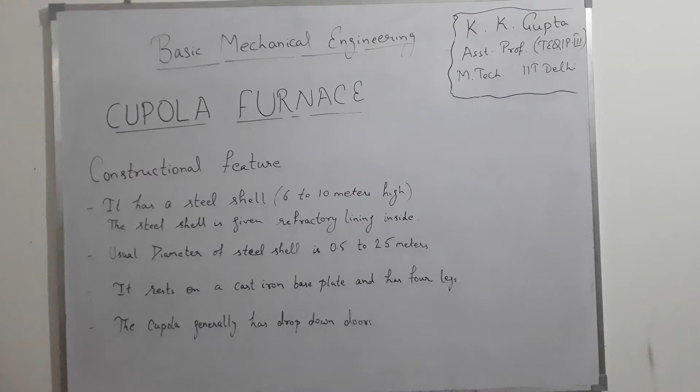Hello dear students, in this session we will study cupola furnace. Cupola is the oldest and simplest furnace. Cupola is derived from the Latin word cupa, which means barrel. It is much similar to blast furnace.

Let's understand the construction features of cupola furnace. It has a steel shell around 6 to 10 meters in height, and the steel shell is given refractory lining inside. Usual diameter of this steel shell is 0.5 to 2.5 meters. It rests on a cast iron base plate and has 4 legs. The cupola generally has drop down doors.

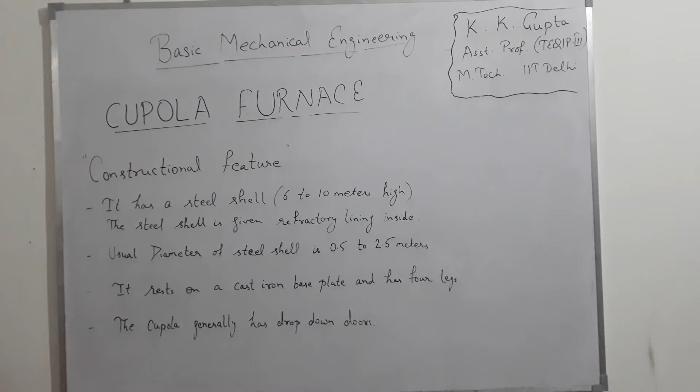At the bottom there is a tap hole to remove molten metal. There is also a slag hole to remove the slag. The charge is introduced into the furnace body by means of an opening approximately halfway up the vertical shaft. The charge consists of alternate layers of the metal to be melted, coke fuel and limestone flux.

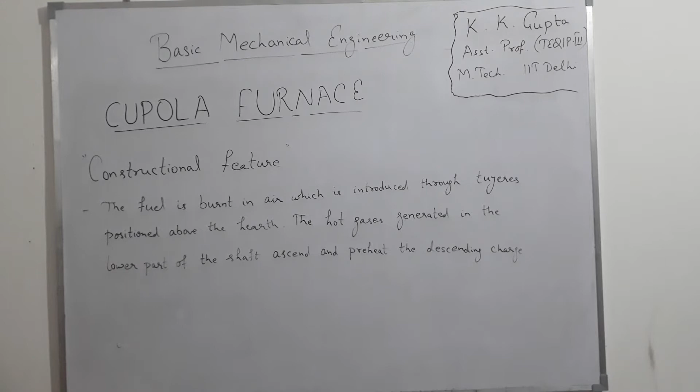The fuel is burnt in the air, which is introduced through tuyeres positioned above the hearth. The hot gas is generated in the lower part of the shaft, ascends and preheats the descending charge. Construction details of cupola are shown in the figure. You guys can pause the video and draw the diagram.

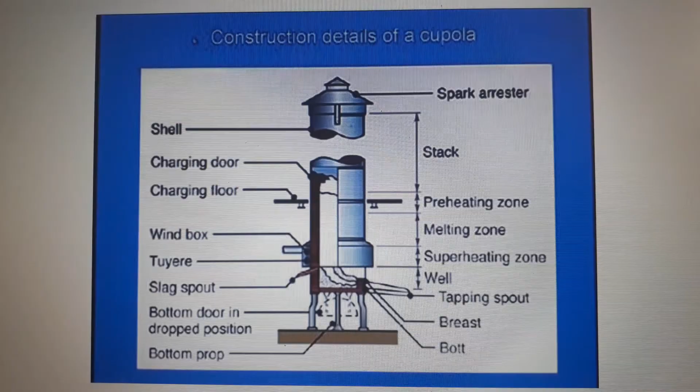Now, various zones of cupola furnace. First is well: the space between the bottom of the tuyeres and the sand bed inside the cylindrical shell of the cupola is called the well of cupola. As the melting occurs, the molten metal gets collected in this portion before tapping out.

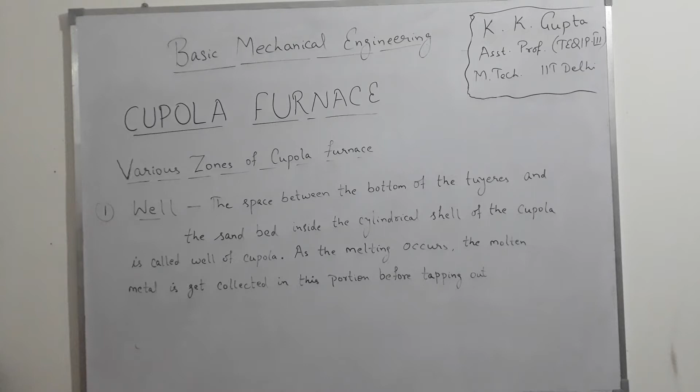Second zone is combustion zone. It is also called oxidizing zone and it is also called superheating zone. It is located between the upper level of the tuyeres and a theoretical level above it. The total height of this zone is 15 cm to 30 cm. A temperature of about 1540 degrees Celsius to 1870 degrees Celsius is achieved in this zone.

Few exothermic reactions take place in this zone. These are represented as carbon plus oxygen gives carbon dioxide plus heat, silicon plus oxygen gives silicon dioxide plus heat, manganese plus oxygen gives manganese oxide plus heat. The combustion actually takes place in this zone by consuming the free oxygen completely from the air blast and generating tremendous heat.

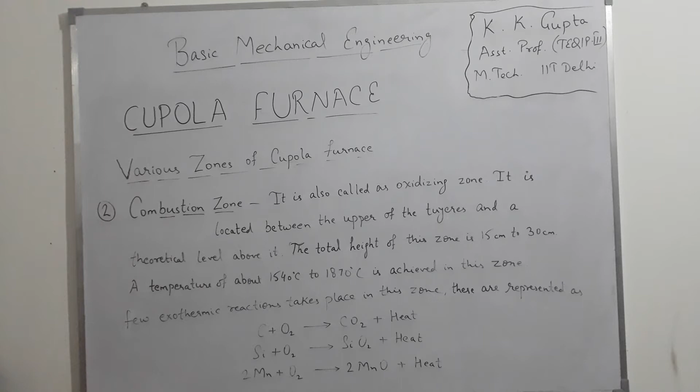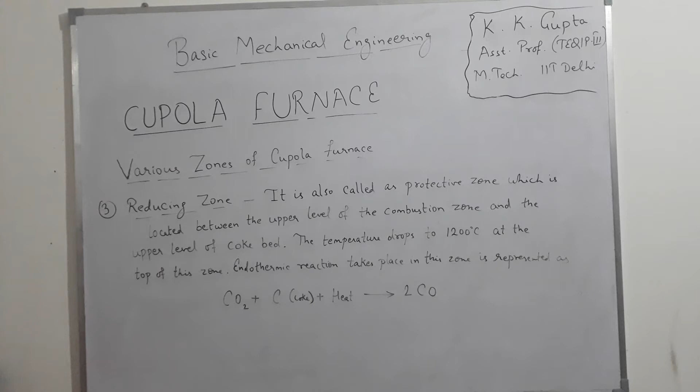Third zone is reducing zone. It is also called protective zone, which is located between the upper level of the combustion zone and the upper level of coke bed. The temperature drops to 1200 degrees Celsius at the top of this zone. The endothermic reaction that takes place in this zone is represented as carbon dioxide plus coke plus heat gives carbon monoxide. Since an endothermic reaction takes place in this zone, the temperature decreases from 1800 to around 1200 degrees at the top of this zone. Combustion zone plus reducing zone is also known as superheating zone.

Fourth zone is melting zone. The lower layer of the metal charge above the upper layer of the coke bed is termed as melting zone. The metal charge starts melting in this zone, trickles down through the coke bed and gets collected in the well. The reaction that takes place in this zone is iron plus carbon monoxide gives iron carbide plus carbon dioxide. It means 3Fe plus 2CO gives Fe3C plus CO2.

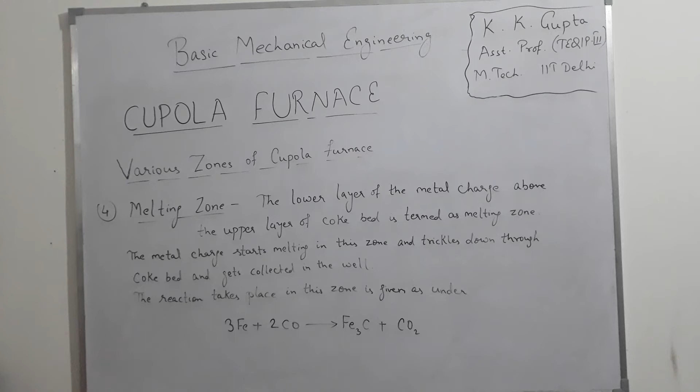Fifth is preheating zone. Preheating zone starts from the upper end of the melting zone and continues up to the bottom level of the charging door. This zone contains a number of alternate layers of coke bed, flux and metal charge. The main objective of this zone is to preheat the charge from room temperature to about 1100 degrees Celsius before entering the melting zone. The preheating takes place due to the upward movement of the hot gases.

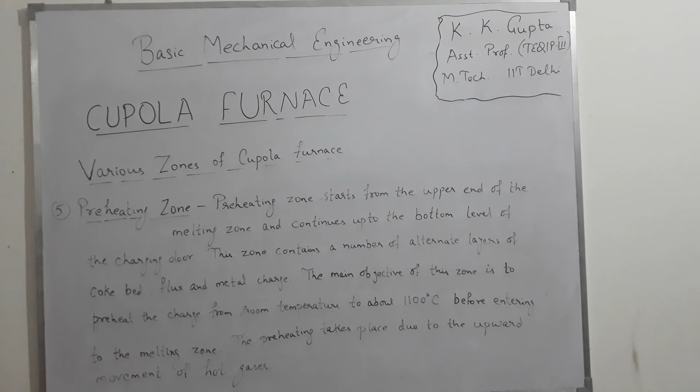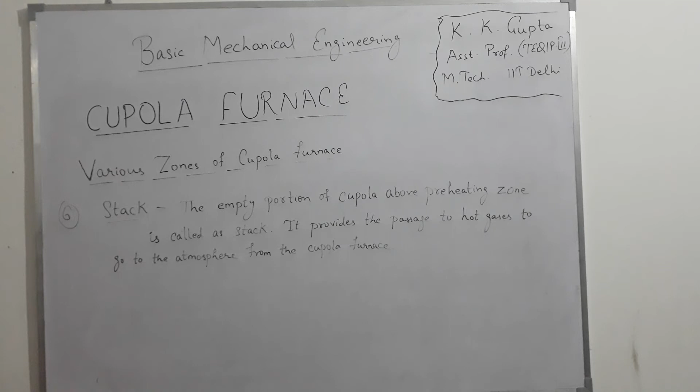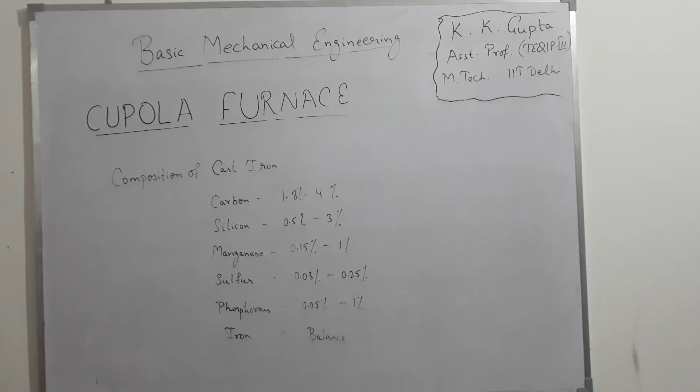Sixth zone is stack. The empty portion of cupola above preheating zone is called stack. It provides the passage for hot gases to go to the atmosphere from the cupola furnace. You can note down the composition of cast iron. Carbon is 1.8% to 4%, silicon is 0.5% to 3%, manganese is 0.15% to 1%, sulfur is 0.03% to 0.25%, phosphorus is 0.05% to 1%, and the balance is iron.

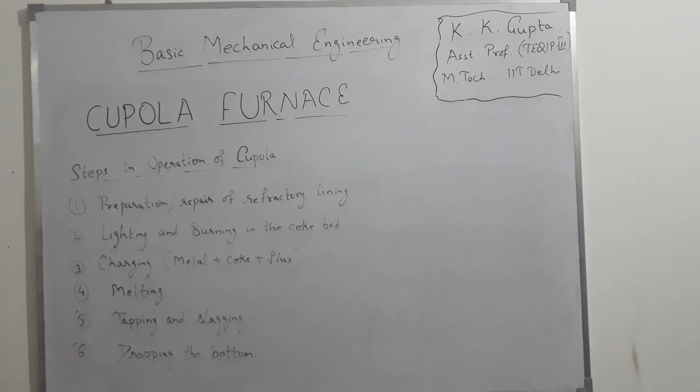Steps in operation of cupola. First one is preparation or repair of refractory lining. Second, lighting and burning of the coke bed. Third, charging. Charging means metal plus coke plus flux. Fourth, melting, which means all the zones: combustion zone, reducing zone, melting zone and preheating zone take place in this. Fifth, tapping and slagging. And sixth is dropping the bottom.

Advantages of cupola furnace. First one is simple construction. Second, low initial cost. Third, simple to operate. Fourth, relative to other furnaces, very low operating cost. Fifth, it offers very high melting rate, 1 to 35 tons per hour. Sixth, it can be operated continually. Seventh, electric power is not required.

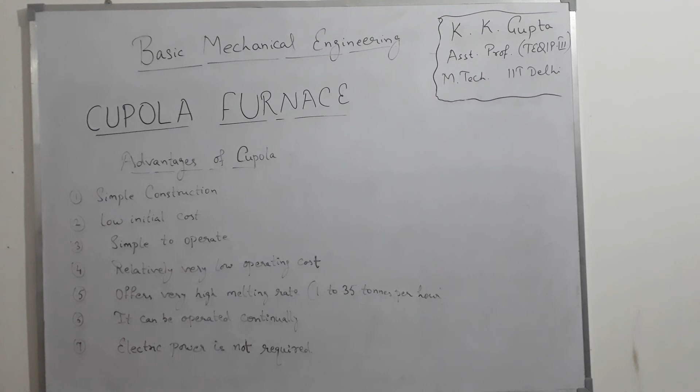Disadvantages of cupola furnace. First is close temperature control is not possible. As we discussed in the combustion zone, the temperature range of 1540 degrees Celsius to 1870 degrees Celsius is achieved. It means it is a range of temperature that we achieve, not a close temperature control.

Second is carbon and sulfur pickup takes place during melting. In the melting, carbon and sulfur are picked up by the metal charge. Because of that, the composition of cast iron is affected. Third is loss of iron, silicon and manganese takes place during melting because of their oxidation. And fourth is environmental pollution takes place.